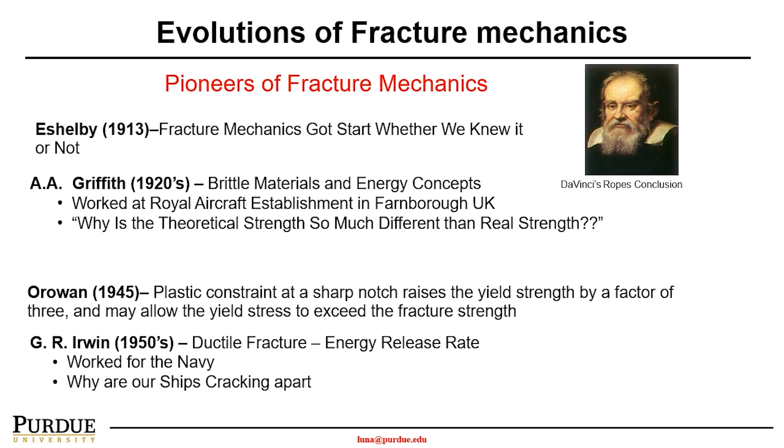Arnold Griffith is really considered the true pioneer who first officially started fracture mechanics as a discipline. He finished his PhD thesis in 1910 and worked in the UK as an aeronautic engineer. He was inspired by why the theoretical stress of the atomic bond of glass is about 10,000 megapascal,

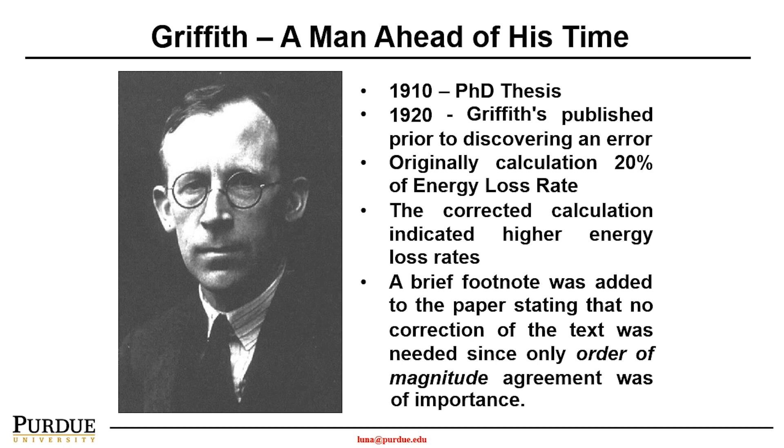whereas the stress needed to break bulk glass is only about 100 megapascal. He studied this and published a paper. An interesting part is a brief note he added stating no correction to the paper was needed, since only order of magnitude agreement was of importance.

Let's begin to discuss the physics of fracture mechanics by discussing the Griffith hypothesis. Griffith asked this question: why is the same material, at a smaller size, typically stronger than a bulk material?

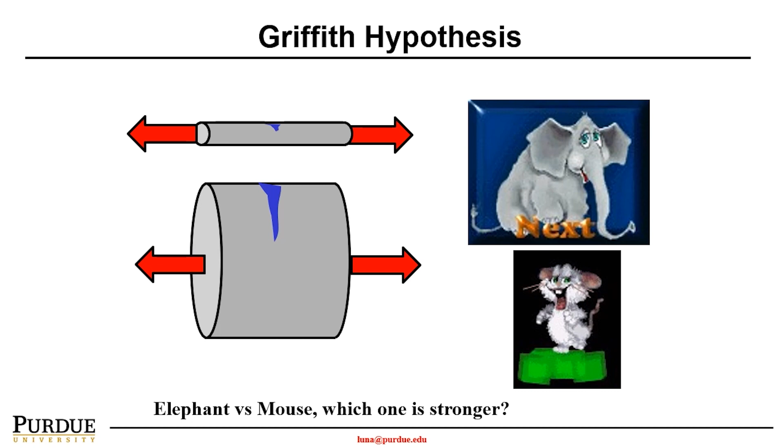In other words, if it's the same material, we could make an elephant or make it as small as a mouse—which one is stronger? Griffith was really motivated by these contradictory facts.

The experimental stress needed to break a bulk glass, such as 16 micron or even bigger, is smaller. For instance, the 16 micron bulk strength of glass is 170 megapascal.

However, the theoretical stress of atomic bonds of the glass is about 10,000 megapascal. This is the theoretical strength needed to break the glass bonds—silicon dioxide atomic bonds—silicon and oxygen. Breaking these bonds requires 10,000 megapascal, which is almost 100 times bigger than the stress needed to break a bulk material.

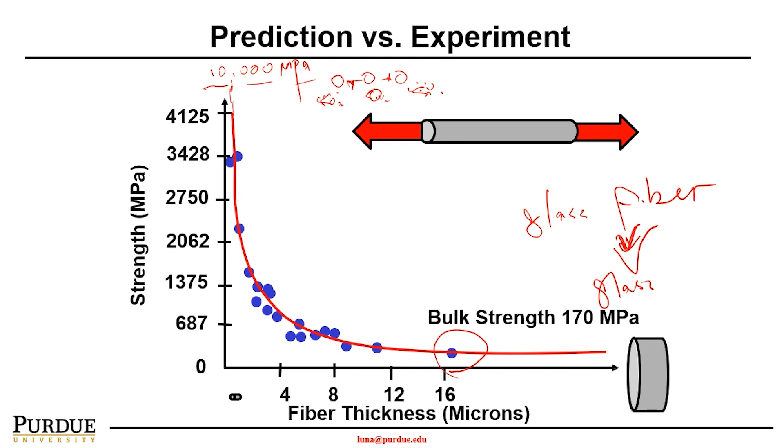As we now know, glass fiber has a much higher tensile stress than bulk glass. This is very interesting—the theoretical stress of a material at a smaller size is actually harder to break than the bulk material. Why is that?

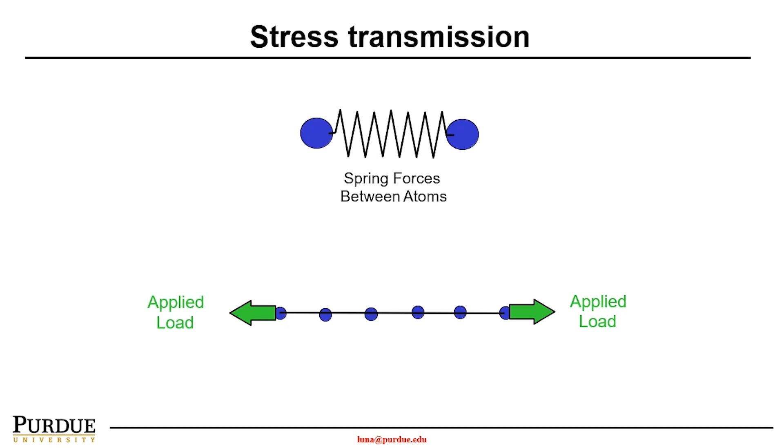Griffith looked at it from the material's atomic structure. If we have a perfect material, we have perfect bonding between the atoms. So when you apply a loading condition, particularly tension or extension of the material, this tensile loading can be transferred through the atomic bond. Once you apply loading to an extent higher than the bonding strength between the atoms, this bond will break.

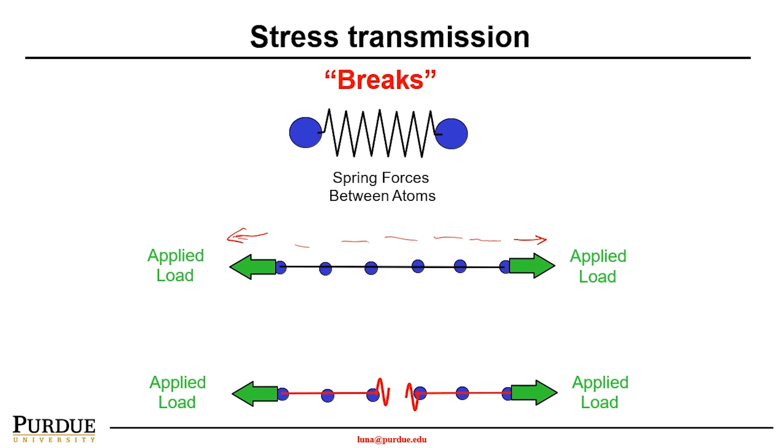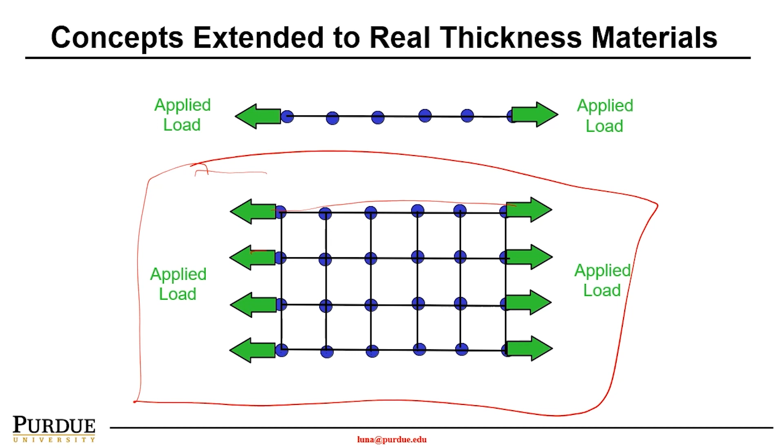So therefore, the material will break eventually. If we were looking at it from the atomic structure level, we can see we have many layers of atoms, and then we apply loading uniaxially. So this load will be uniaxially transferred through the materials. However, if a certain bond is broken, what happens is the applied load will transfer passing through this and then concentrate in this area.

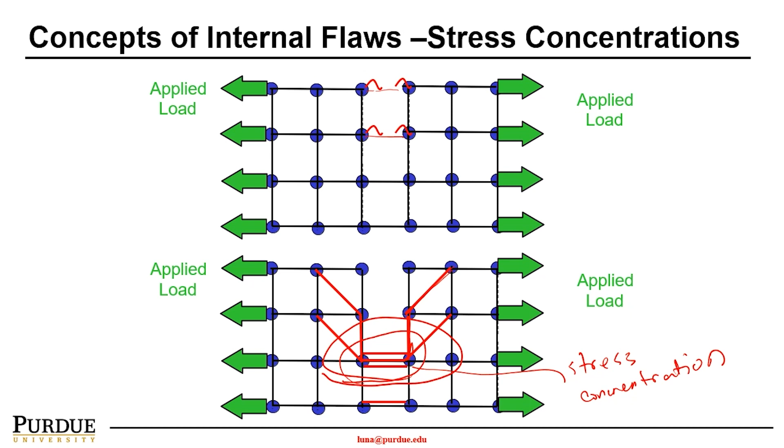So therefore, the stress concentration will be happening in a certain area, which is actually on the edge of the defects. So as such, when the material has an internal flaw, the flaw size becomes very important, and also the geometry. That's why we need to use non-destructive testing methods to understand the crack size and the geometry.

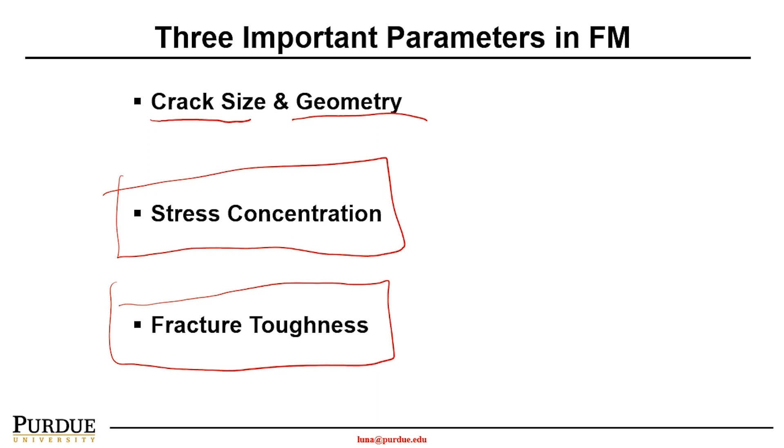Why? Because also in fracture, the material will have significant stress concentration in the defect area. And whether the material will break or not really depends on the material's intrinsic ability to resist fracture, which we call fracture toughness. So those are three important parameters in fracture mechanics.

So to study the material behavior under loading conditions when the material has a pre-existing crack, in 1913 Inglis proposed a method to solve this by looking at the elliptical hole in an infinite plate.

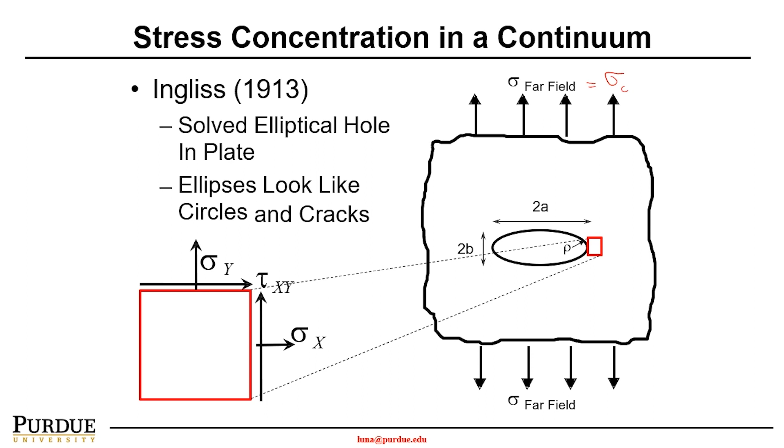If there is a crack, we define the size of the crack with 2a as the length and 2b as the height. The elliptical shape looks like a circle with cracks, so that will be like this case. The material has infinite size, so therefore sigma far field, also called sigma null, is applied in the material surrounding.

If you're looking at this case, the geometry of the crack is very important. The sharper the crack, the worse it is, right? So the radius of the crack - if I have the crack, here's the tip of the crack. If you blow this up, here the radius, if we make it bigger, the radius of this curvature of the crack is rho.

And rho is equal to b squared divided by a. Again, b is half of the height of the crack, and a is half of the length of the crack. The reason it's half is because, from a symmetry standpoint, you can think of this as actually two cracks put together.

So the sigma local, the stress concentrated at this point at the tip of the crack, should be equal to sigma far field, the loading sigma null applied on the material, times 1 plus 2a over b. Or we can rewrite this as sigma null times 1 plus 2 root a over rho, where rho is the radius of the crack curvature.

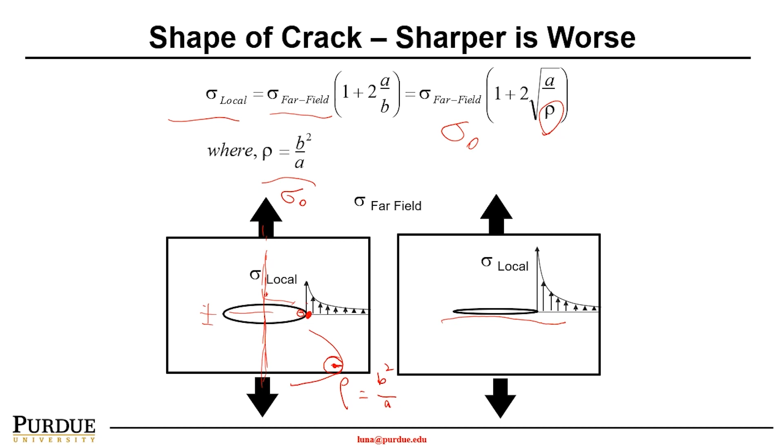As you can see, the sharper the crack, the smaller the radius of curvature, and the more the stress will be magnified, so it will be higher concentrated. If the crack is very, very sharp, rho is very small, and in this case 1 is very insignificant compared to 2a over rho. So therefore, sigma local should be equal to sigma far field times 2 root a over rho.

We call that the K factor. K is the stress concentration factor. K is equal to sigma local divided by sigma null, or sigma far field. That equals 2 times the square root of half the crack length divided by the radius of the crack curvature. So K is also called the stress concentration factor, meaning how many times the far-field stress has been magnified at the tip of the crack.

That is the most sensitive region. So therefore, the stress concentration factor is used to study at what condition, at what loading condition, the stress will become very unstable. What happens if a very, very sharp crack exists? That means rho approaches 0, so therefore K approaches infinity.

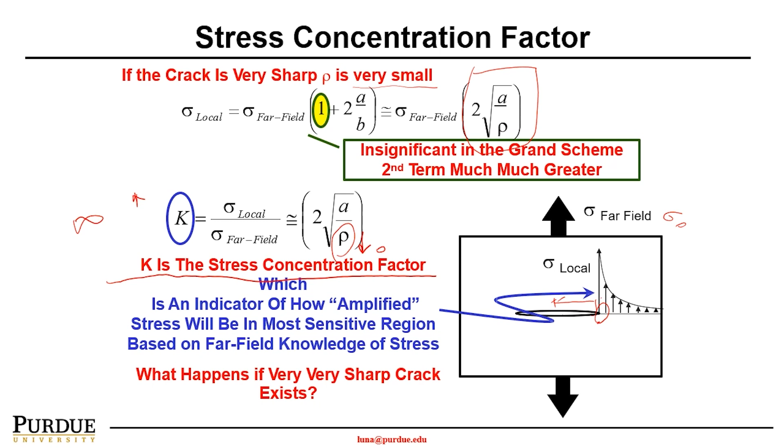So from a physics standpoint, we understand this. However, from a mechanics standpoint, it's very hard to calculate. So therefore, there is another study method called the stress intensity factor. The stress intensity factor is very different from the stress concentration factor. It looks at the stress analysis around the crack in an infinite plate, meaning there's no boundary condition for the stress.

So in this case, we can rewrite the equation for sigma when theta equals 0, meaning the crack in this direction, with the crack tip here. That equals Kc divided by square root of 2 pi r. Kc is called the stress intensity factor, or K critical. And Ki is the stress concentration factor. So those are two very different concepts.

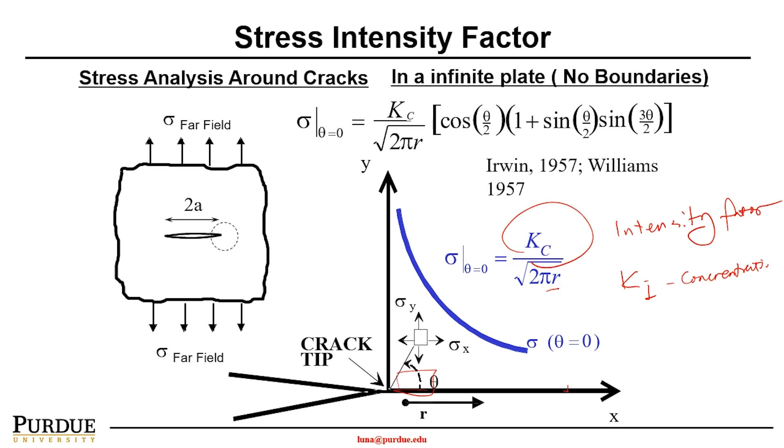So as discussed, we will look at Kc, right? Kc is a stress intensity factor, critical. It means when that value reaches the critical point, or when the crack becomes critical, or the length of the crack has grown substantially, so it becomes critical.

Specifically, we were looking at one type of the stress intensity factor called K1C. K1C is a plane strain intensity factor. There are three types of modes of stress crack opening.

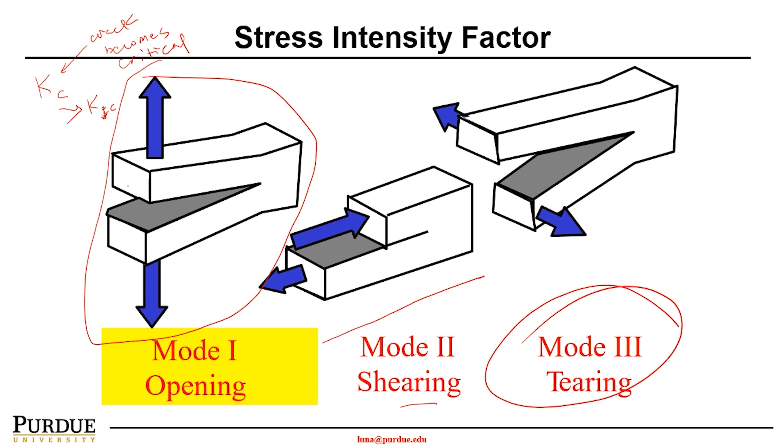One is just the stress opening under normal stress, the tensile loading. Or you have a sliding effect, which is mode 2, the shearing. So you have this opening, sliding, and this is mode 3 for tearing. In this class, we will only focus on K1C, which is the most common stress opening case for many materials and structures.

So looking at K1C, I want to introduce a concept called fracture toughness. Fracture toughness is a material property describing the material's behavior at the tip of the crack where the stress becomes critical. K1C is the stress intensity factor, also known as fracture toughness. One is the opening mode, one, and C is critical. So K1C is also called the stress intensity factor.

So when K is smaller than K1C, it's safe. But if it's bigger than K1C, the K value being bigger than K1C is an unsafe design.

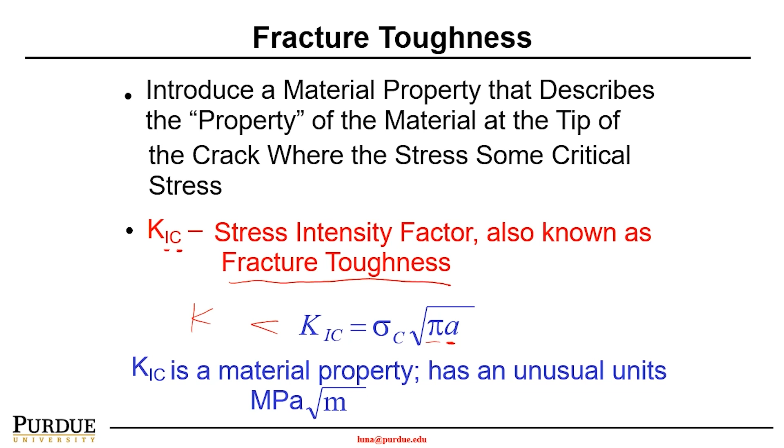So how do we determine K? We can use sigma times the square root of pi times a, the half of the length of the crack. So K1C is a material property with unusual units, megapascal square root of meter.

So in this case, as we can see, K1C equals sigma critical times square root of pi times a. A is half of the length of the crack if the crack is in the middle. If the crack is on the edge, that should be the length of the crack times the F geometry factor. So sigma C should be equal to sigma times the F geometry factor. Sigma C is the sigma at the critical point.

The crack will become very unstable. That equals your far field sigma times your geometry factor. The geometry factor depends on where the crack is located, which definitely matters. If we consider this as an infinite plate, if the crack is located in the middle, we apply a factor of 1.0. If the crack is on the edge, clearly it will be more severe, so your F geometry factor will become 1.12.

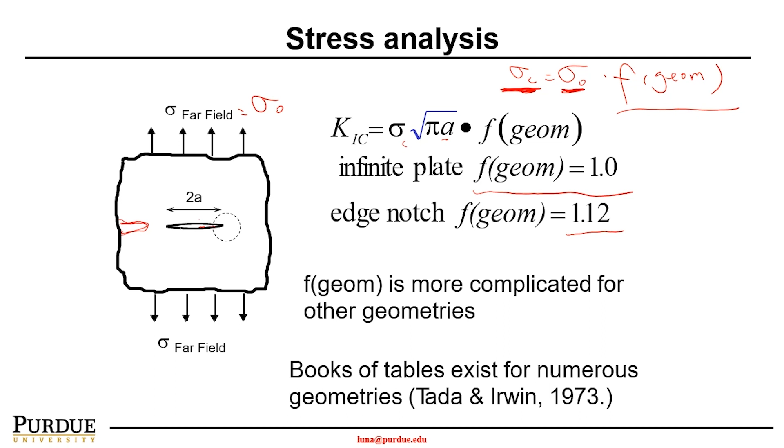That's the simplified version we'll use in our class. In real engineering design, there are books of tables for numerous geometries based on Tada and Irwin's design in 1973. This can be a very complicated geometry factor. So using the stress, crack size, and material toughness, this design approach is called flaw-tolerant design.

So in this case, if we look at the stress-strain curve, you have a material going through linear elastic behavior, then reaching a plateau, then going to the plastic region, then you have sigma F, and then sigma ultimate stress, or sigma yield. This is your ultimate stress, or the strength of the material. As we can see, typically sigma C is way smaller than your sigma ultimate, because in this case we consider this a continuous material with no discontinuity, no defects.

However, if I have a defect, when the flaw size gets bigger, you have what we call a fracture toughness curve, and then you have your sigma C, which is a critical stress that should be way smaller than your ultimate strength of the material. So that's what we call the newer design approach called flaw-tolerant design. In this case, we have pre-considered the existing fracture or existing defects in the material, using K1C as a design parameter rather than the sigma ultimate strength of the material.

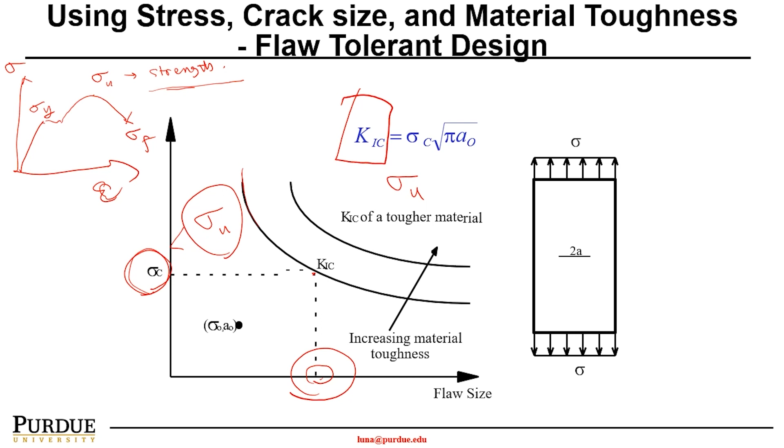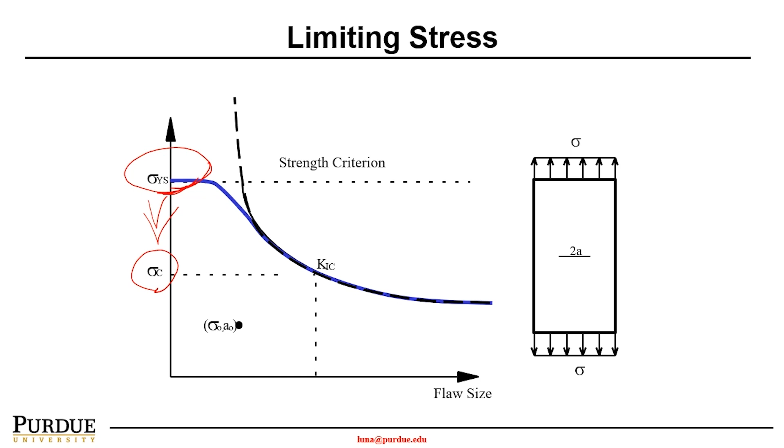As explained, by using the fracture mechanics flaw-tolerant design approach, the sigma critical, which is the allowable stress applied on the material, is typically way smaller than the sigma yield stress of the material. This is a strength criteria. If I look at a strength criteria, maybe the designed allowed stress will be way higher than the actual stress you're allowed to apply to the material when it has existing defects.

With that, I'm going to wrap up this lecture, and coming next is fracture mechanics behavior 2. We will continue our discussion on this topic.